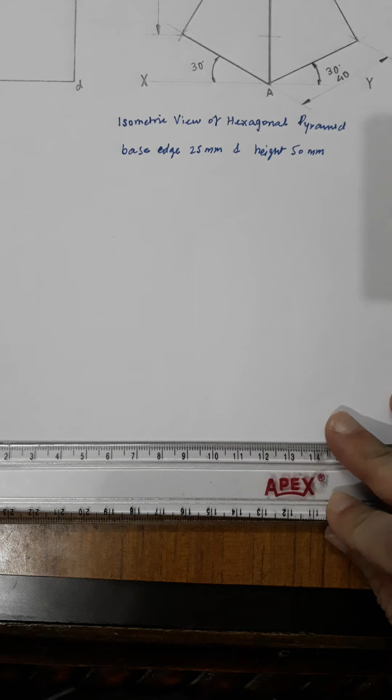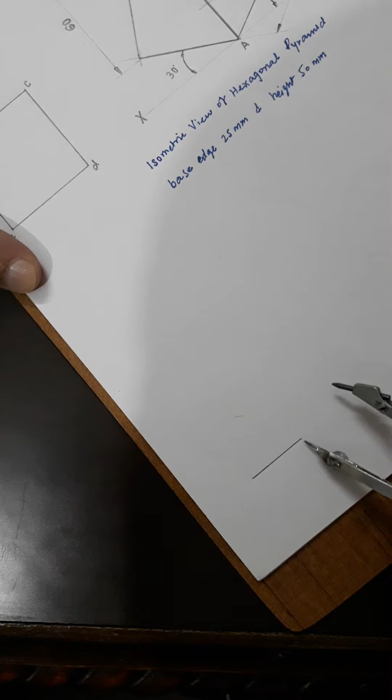Draw the hexagonal pyramid, base size 25, height 50. So first I will draw the hexagon, regular hexagon, 25 mm side. So I am taking this 25 mm. Now I will draw the regular hexagon by using the circle method. Yes, I will be drawing the circle.

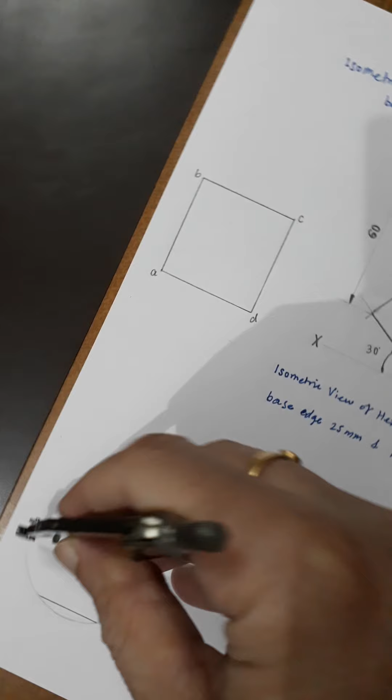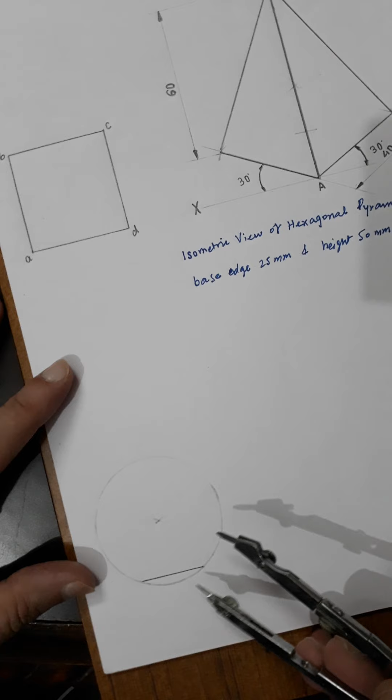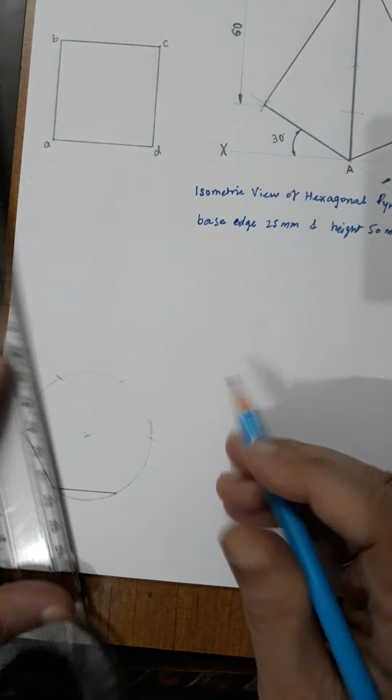Yes, and then I will be marking these 6 arcs, with the same radius of the circle. Now I'll be joining these points, whatever points you have got. So it is a regular hexagon now.

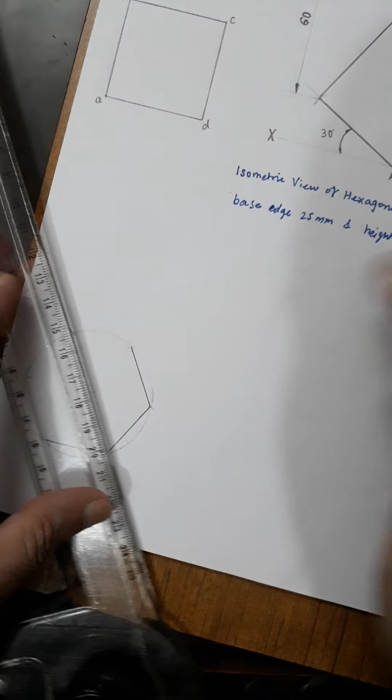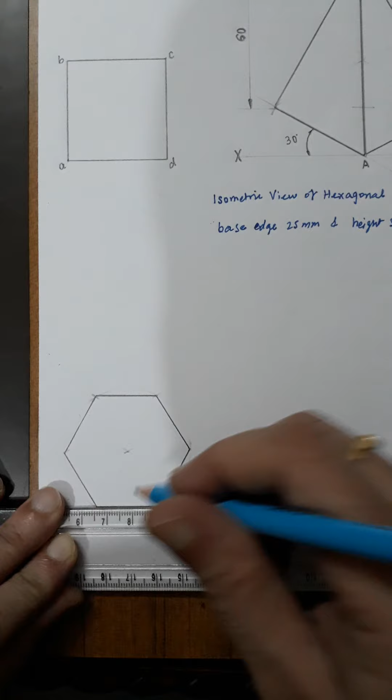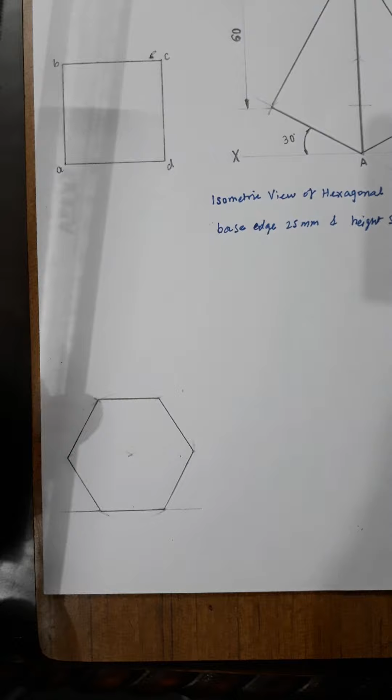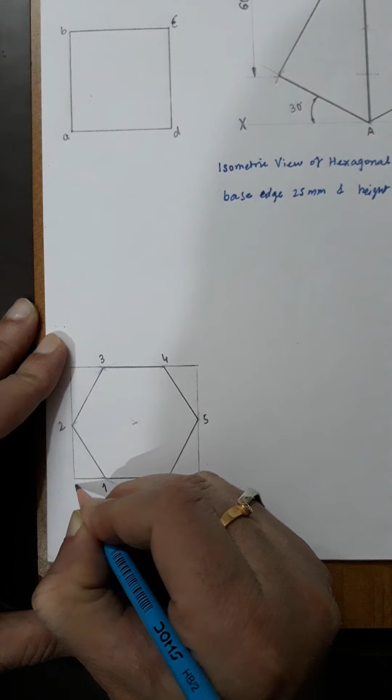Yes. Okay. Now you can make the outside rectangle. Simply draw the horizontal lines and the vertical lines through these edges. Join with these vertical edges. Now you can name it as 1, 2, 3, 4, 5, 6, as usual, as I have discussed earlier. So A, B, C, D, the outer edges of the rectangle made.

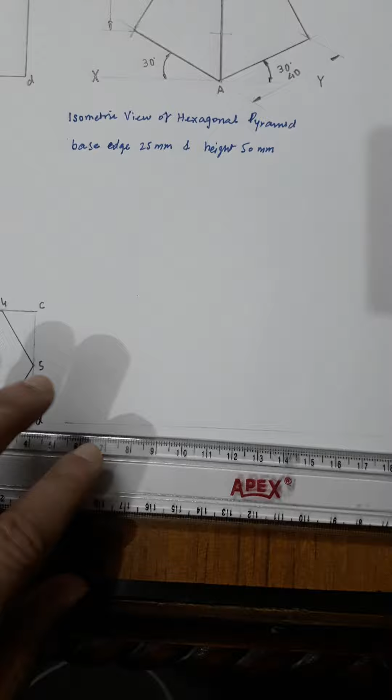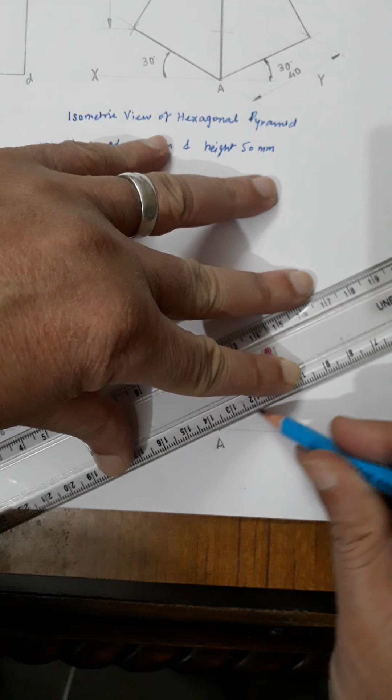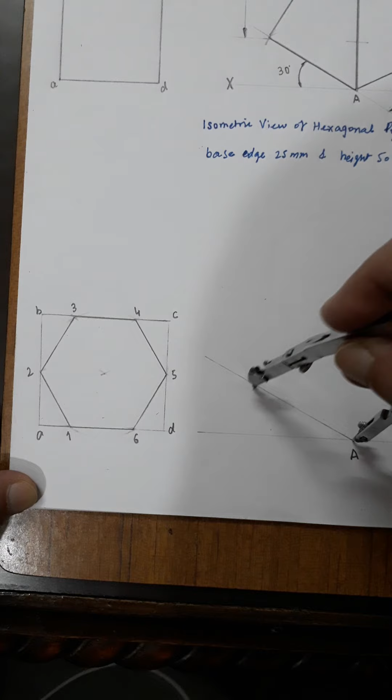Now you have to draw a reference line. Then mark any point A here. So this is A. Then you have to draw two 30-degree lines on both sides. I have measured this 30 degree and 30 degree on the other side as well. Yes. Now you can simply take the distances from this left side rectangle onto this isometric: AB, and AD I have to take from here. So this is AD. It will be the same as BC. BC will be equal to AD and DC will be equal to AB.

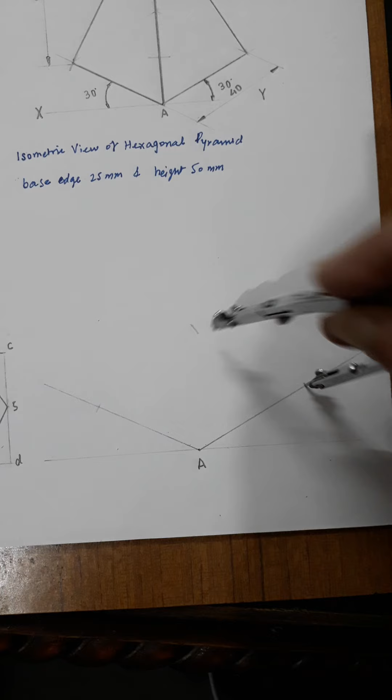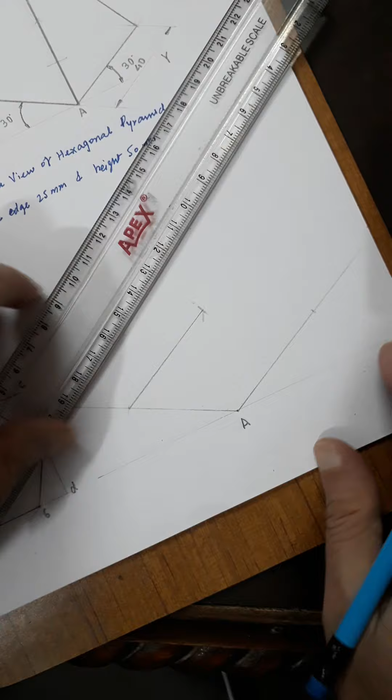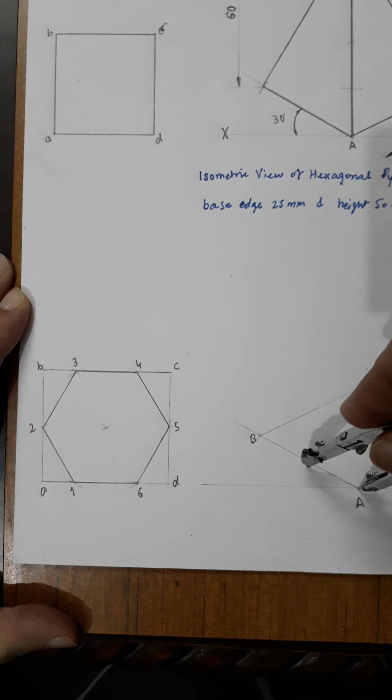Now you can join these with thin lines. Always join with thin lines. Okay, make it thick if it is required, because it is the outside rectangle only. Now you can check: this 2 lies between A and B. Point 2 you can measure from this left side and you can mark it. 2 and 5 will be at the same distances. 5 will be between C and D. 2 will be between A and B.

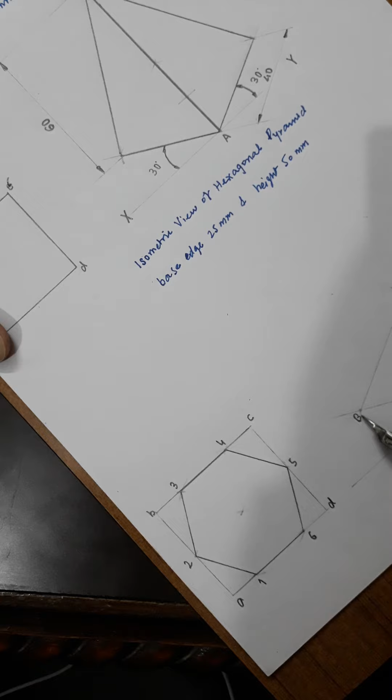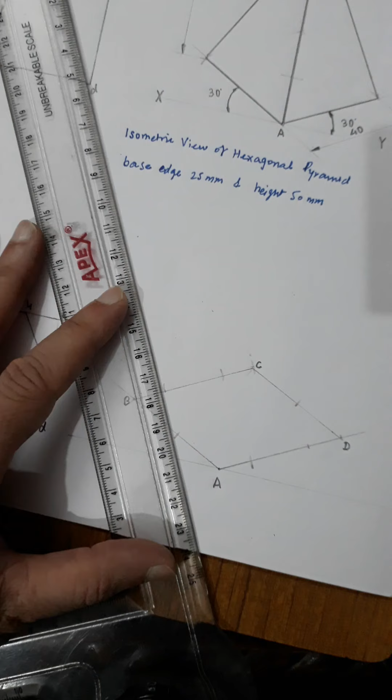So you can find out 4 now, 4 and 3. 4 here from B4, you can mark it, and A6 will be the same. Yes. Similarly, the other 2 points. Yes. Now you can join these points. Thin lines. First you draw the thin lines only. Yes. So this is the hexagon.

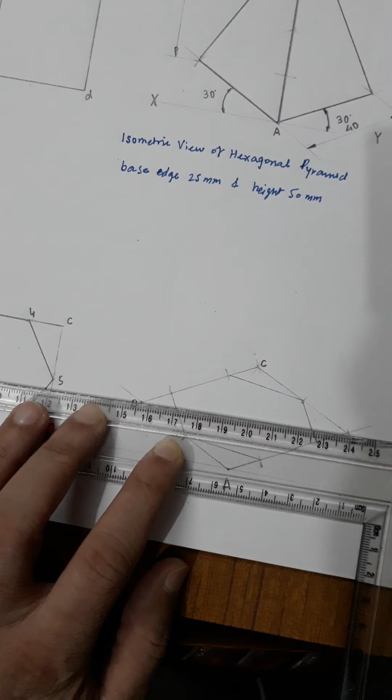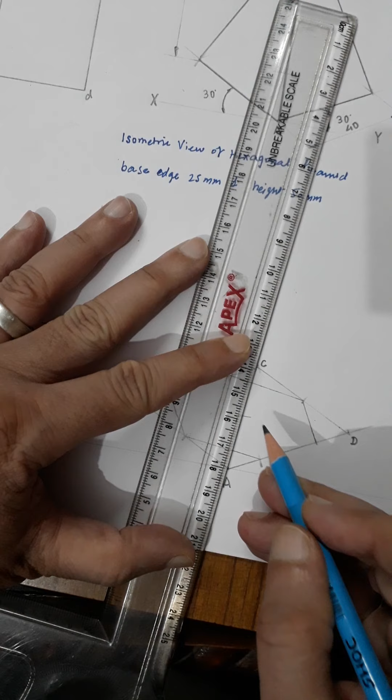Now you have to find out the center. I am finding out the center here, by joining these diagonals. There are so many methods to find out the center. So this is the center. Now I will be measuring this height as 50 mm. It is given the vertical height is 50. So measure it 50 mm, along this chain line. Okay. And this is 50. I have measured.

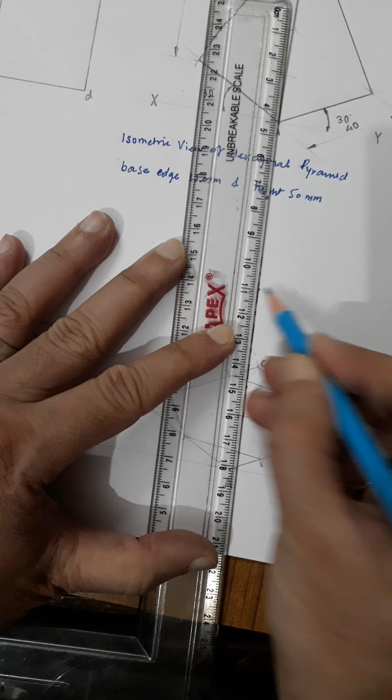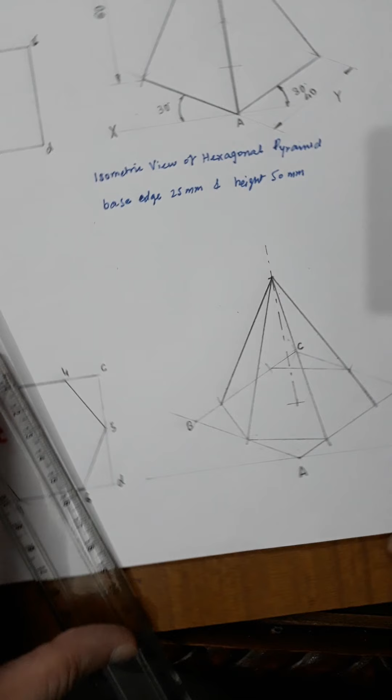Now join all the edges to this apex. This point is the apex. You can join all the edges. First join the front ones. Back ones will not be visible. Only the front edges will be visible. Those which are at the rear side are not going to be visible. Yes. Whatever is visible, you can make it thick edges at the base.

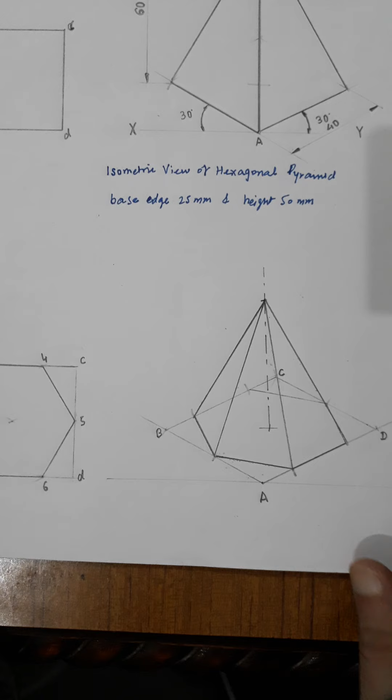Yes. So this is the isometric view of a hexagonal pyramid. Now I will be erasing any unwanted lines. So this is complete. Now I will be doing the dimensioning. So I have done the dimensioning as well, as per the aligned system. I hope you got it.